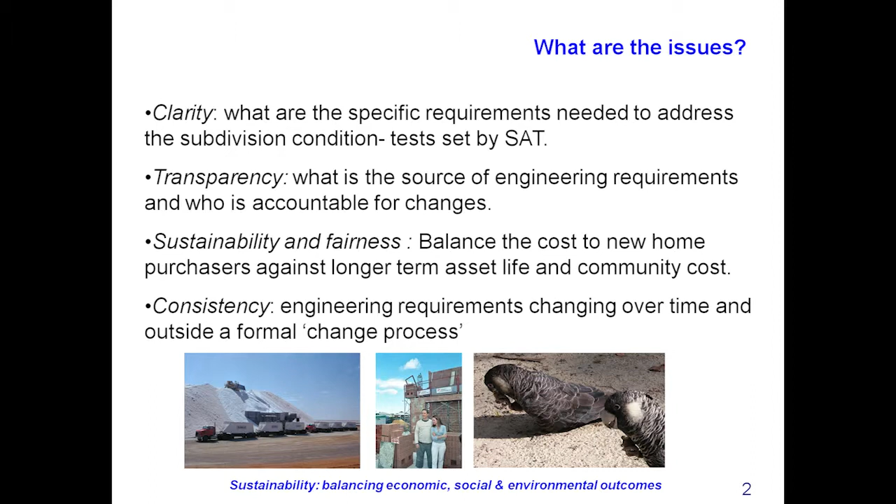Consistency, we mentioned that early on. Land development process, to be truthful, zoning and structure plan, and it says here, that's when you technocrats have got to get involved. Don't wait till you get the subdivision plan. That's a cadastral plan. It's already been to the state. It's already been approved. It's done. How many of you have turned around and said, hey, can't fit a roundabout in? I'll tell you why, because you didn't consider at this stage which were going to be your arterial roads and your district distributor ways and so on.

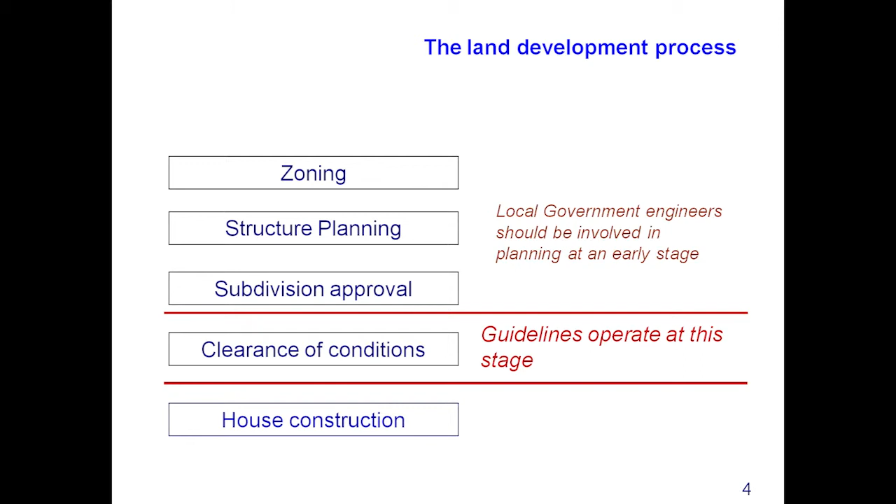And then your clearance, and that's a beauty. You know how you all tick the box and you sign off and you say, yeah, we've cleared it. No, you haven't. There's only one clearance authority in the state, and that's the WAPC. All you've done is said to them, we think they've done what they were supposed to have done. So our consultants overview, I'll run through very quickly. It needed to be upgraded. Legislation had changed, and we've been through that.

Policy documents, Liveable Neighbourhoods. How many in here hate it? Yeah, great, there's only one problem. State government's approved it as a policy, so learn it. Now, the reason you hate it, and I'll argue with you later, that's why I won't be here at morning tea, you haven't read it. You've read the bits you want to read. Read it from front cover to back cover, and guess what? All your standards apply. All the criteria that used to apply still apply, except you've got to prove it.

Biggest one, truncations on corners. Don't need them, and you don't. Two cars travelling at 30k don't need a truncation on two 14-metre road reserves. Check it out. Go and do your Austroads calculation. Lift the speed limit, and yes, you do need them. And that's all it says in Liveable Neighbourhoods. Check your Austroads, prove your calcs and say, I need a 4x4 or a 6x6 or a 3x3, and it'll be given to you. There's not a problem, but you've got to do the work, just a little bit of work.

Innovations and materials, as we would all say, and drainage is probably going to be the biggest innovation that's coming up. Water sensitive urban design. Don't we all love it? I've got a nice little catchphrase for you at the end, and then I'll run.

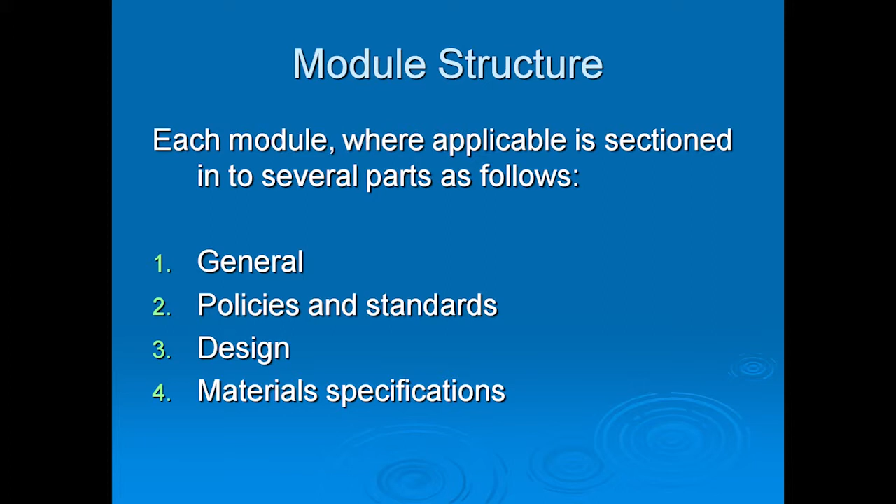You've had asphalt, stone mastic asphalt, and so on over a period of time. We structured the modules such that they've got a general part, policies and standard, the design, materials and specifications. That runs consistently through the document. And here's module number 4, drainage. The ones that we picked up were Stormwater Management Manual, Better Urban Water Management and Liveable Neighbourhoods, because those 3, if you put them together, will generally give you a very, very good basis of designing drainage.

Liveable Neighbourhoods is element 5. You've got water sensitive urban design. This one, and I'm assuming Bill Till will talk a lot about that, is water quality. That is into our water bodies, our groundwater, and so on. I know Jim Davies did a lot of work for the western suburbs on water going to the ocean and so on, and he may allude to that. I'm going to highlight later water quantity.

Now, you can look in the eastern states and say, well, why would we bother? But that's to do with the Department of Water. Those of you that want to get into flood mitigation, go and talk to the Department of Water. They've got 3 guys in there to do nothing else. And they look at all the risks. And if you go through Australian Rainfall and Runoff and you look at flood mitigation, it's about that thick. And I'm not smart enough to go through it, I'll tell you now.

Nuisance insect management, flood protection, that's flood, not stormwater. They're two different things. A storm recurrence gives you so much water. A flood is when it rains and rains and rains, and then all of a sudden what was up the catchment comes down the catchment and we end up with the flood. Groundwater drainage, wouldn't see you doing a lot with that. Stormwater infiltration, yes, you'll be looking at that because that's part of water sensitive urban design, and flood storage.

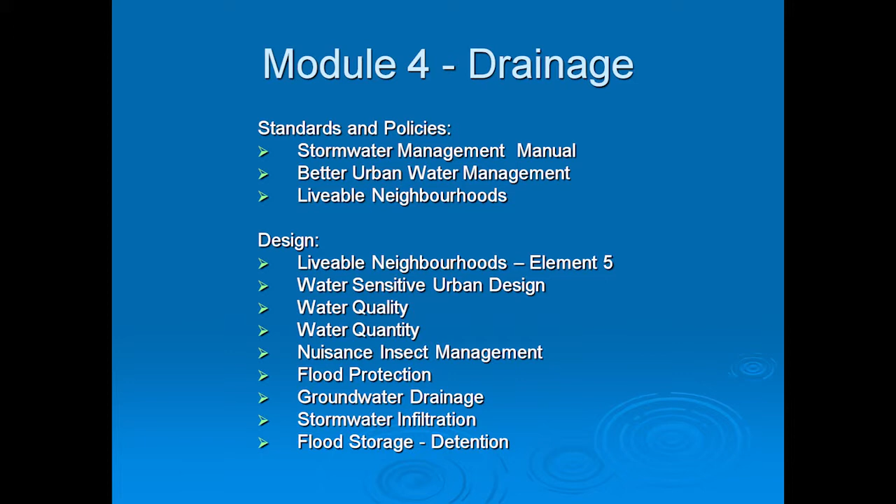Standards and policies, that manual, I'm not going to go into it, you can actually see it online. Same with Better Water. Most of this has come from the Commission and the Department of Water, and Liveable Neighbourhoods. So they're the 3. I have no intention of trying to go through those in a 20-minute talk.

Those of you that are up the back, there are seats down the front if you want to come down.

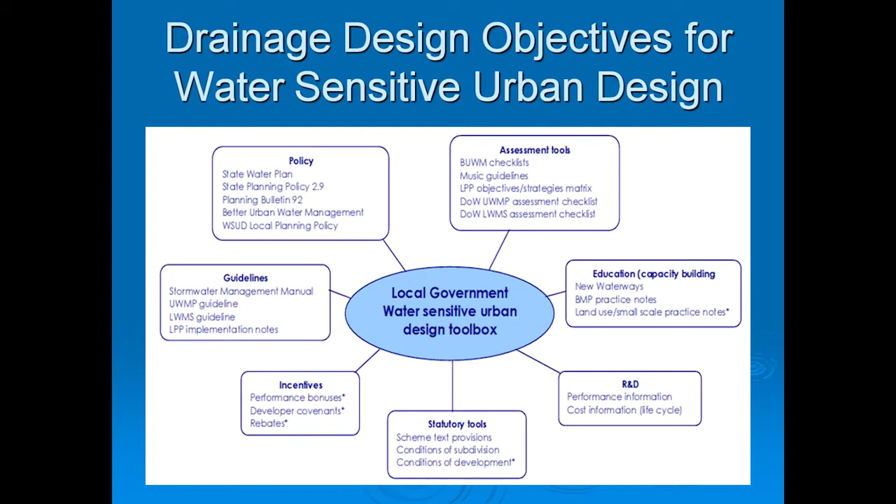So there is a chance there. Those of you that are CP engineers, these sort of things keep your qualification up. So there is new performance information, cost information, statutory tools, scheme provisions, which is where they're suggesting most of our stormwater requirements should be put into our structure plans and schemes. I think there's ways of talking to developers and saying, guys, if you do A, B and C, you'll get something out of it, and so on. And then there's your guidelines. So you probably need to have a look at that.

The principle is post-development discharge should be maintained at the pre-development conditions. Now, if that happens, you don't have to do a lot. Now, anybody knows if you've got a bare land and you've got bush in that and you go and clear it all, the coefficient of runoff changes pretty bad. You put roads in and all of a sudden certain of those areas are 95% runoff. Bang. There's no way in the world you're going to be able to make the post-development such that it equals pre-development and then not have to do anything. So I think that's one of the principles you need to look at. And you're looking at protecting your built environment from flooding and waterlogging and minimise public risk.

I've had an occasion, I'm currently working at a local authority, a 20-year storm went through probably about 2 months ago. And a guy got flooded and somebody said, but he built in the bottom of the hill. What's he expect? I mean, has anybody got a subdivisional condition that says if you buy the block at the bottom of the hill, you're a drainage sump? Because the drainage sump, surprisingly enough, is straight across the road from him.

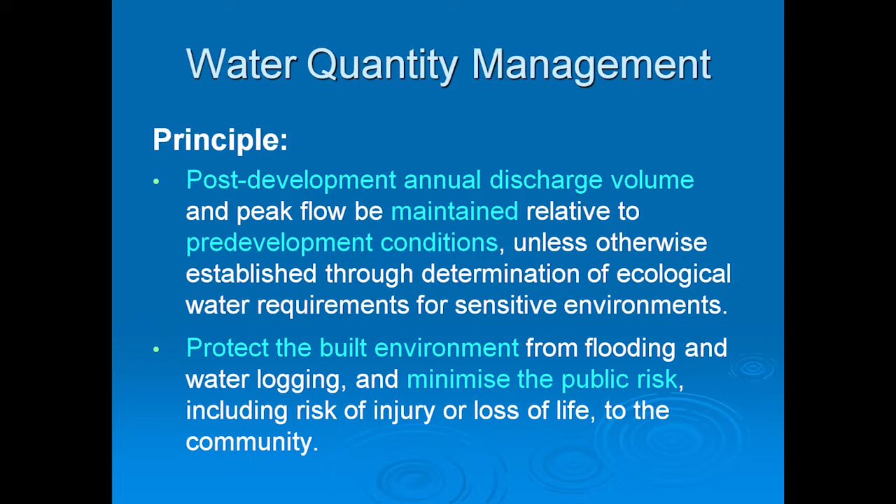Sent us 1986 photographs, probably should have whacked one in here, of a bloke rowing a canoe up his street. Meanwhile, his house has got 300 to 400 mil of water in it. He's now put in the insurance claim and the local authority is going to pay. There's no question, because when you see the catchment size, somebody didn't get it right. He's got the gullies at the bottom and the catchment is, I don't know, 52 hectares or something. Now, if you use just a little bit of common sense, you'll realise that there's no way in the world 2 gullies at the bottom of the hill is going to take that water in and get it across. It's just not going to work. So you've got to look at how you do that. Water quality, maintain surface and groundwater quality at pre-development levels.

And if possible, improve it. Now, some of the thought is, if we've got our massive drainage systems, is to do storage up the catchment, see if you can get it into an aquifer and stop it getting to the end. And to give you an example, you know, they like big stripping ponds, nutrient stripping ponds.

The Bayswater main drain, we're going back probably 20 years, had 6% of all the nutrients into the Swan River coming out of the Bayswater main drain. And our environmental people, and we formed the Bayswater Integrated Catchment Management Group, came up with this magic idea: we're going to have a nutrient stripping pond at Riverside Gardens before it goes in, 4.5 hectares. There was no Riverside Gardens when they'd finished with the nutrient stripping pond. No way the council was going to entertain that.

So we've gone back, looked at living streams, put things up the system, changed water from going one way to another and storing and cleansing water. And guess what? If I'm correct, we're down around about 1.3% into the river now. Now, it may have taken 20 years to do, but that was the alternative. But you've got to have a look at seeing if you can improve it.

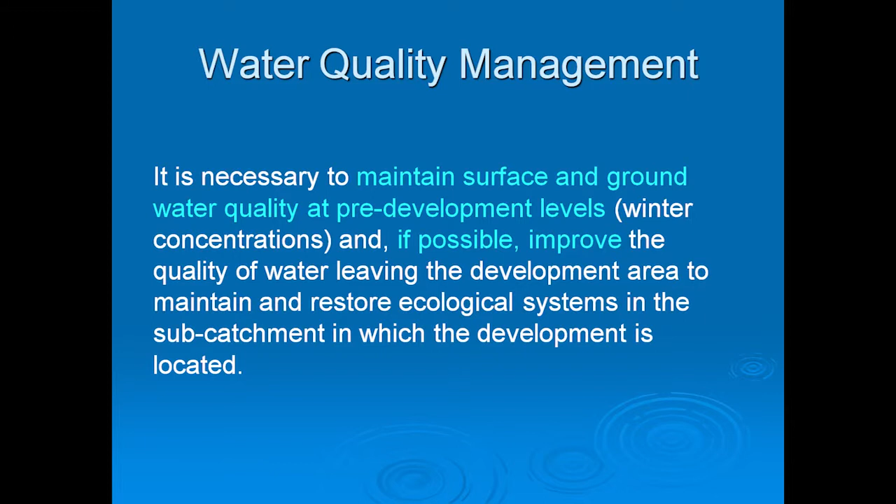Disease vector, what that's about is health risks from mosquitoes when you have retention and detention basins. And I got an education last week at the Peel Inlet, and they showed us all this mosquito breeding, and I was one of these idiots that thought 150 mil, warms up, mozzies, bang. So if we keep the water deep, it's okay. They showed us water like this, reeking with mosquito larvae, and I didn't think that happened. So you need to be pretty careful with that.

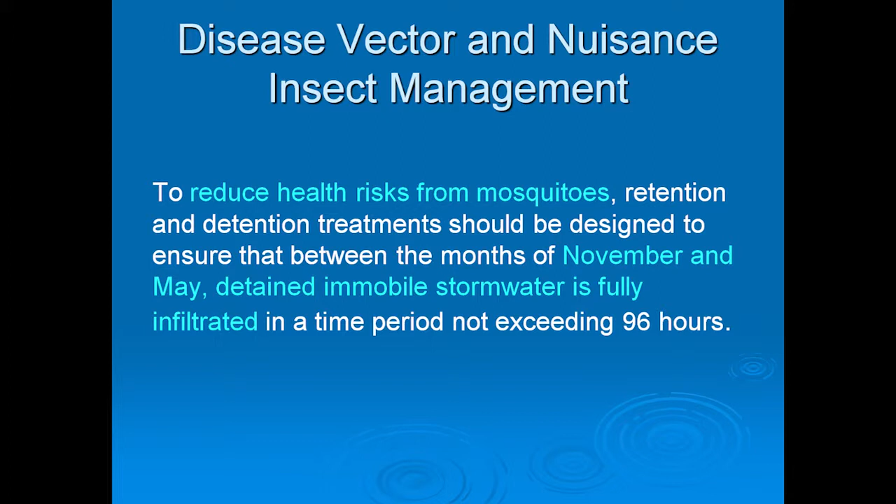Obviously, between November and May, detained immobile water is fully infiltrated. In other words, after you hit November, we prefer you to have no water laying around, unless it's in a lake or a river. You don't need to have areas where there's little bits of water laying around all over the place. So they wanted 96 hours, divided by 24, that's about 4 days, roughly. So that's what they're looking at.

Planning an integrated cycle. Consideration of water issues must be integrated with other planning and development. And that can include major shopping centres, major industrial areas and so on. You're looking at how you can dispose of that water without sticking it in a pipe and taking it faster than it used to make it to the water body.

That's the thing you need to remember with pipe drainage, that you may have runoff and have had it for decades, but as soon as you stick it in a pipe, it's now travelling way faster than it ever did before. Therefore, it gets to the end a lot quicker, and that is one of the reasons you can cause flooding downstream.

Key elements of your water-sensitive urban design.

I better just keep a check on here. I'm just about done. 2 minutes. I better get to that.

Flood protection. You can actually get these straight out of the manual. Okay, I've done that. They want a 1 in 1 year storm to go into your rain gardens, and above that, then it goes into a pipe system. So if that water's reduced, that means your pipe system's reduced.

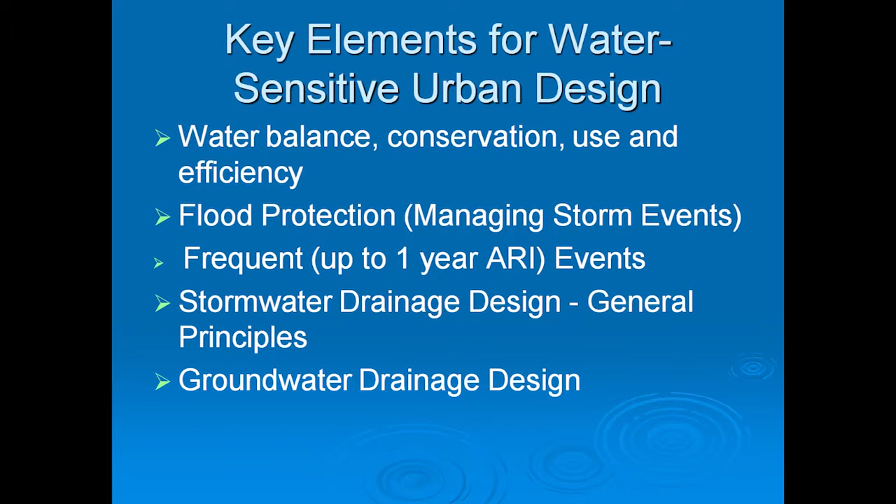The only question I have is what happens when you don't. I think everybody designed residential for 5-year and commercial for 10-year recurrent storms. What happens when you get the 20-year storm? None of it's going to work. So then you need to look at overland stormwater design, groundwater drainage design, urban areas, and I mean this is not rocket science, you'll all know this.

Water sensitive urban design, you've got grated gully side entry pits, you've got junction pits, subsoil drainage, these are all in this section 4, primary and district distributor roads, and there's a factor on there about the width of water in a gully, in a curb line. On major roads, you don't want traffic travelling at 70, 80, 90k and they're ploughing through 3.5 metres of water. Generally a metre is it.

So if you look at a car at 2.5 metres wide, you've got a 3.5 metre lane, you've got a metre of water, you've still got enough surface of the road for the car to run on.

Access, flood storage, detention facilities, I think they're pretty straightforward, and stormwater infiltration. That's a bit of a science because you've got to look at the permeability of your soil, what your inflow is, what your outflow is, and then you've got to have basins that take into account to hold that water for a certain amount of time while it infiltrates and the rest comes in.

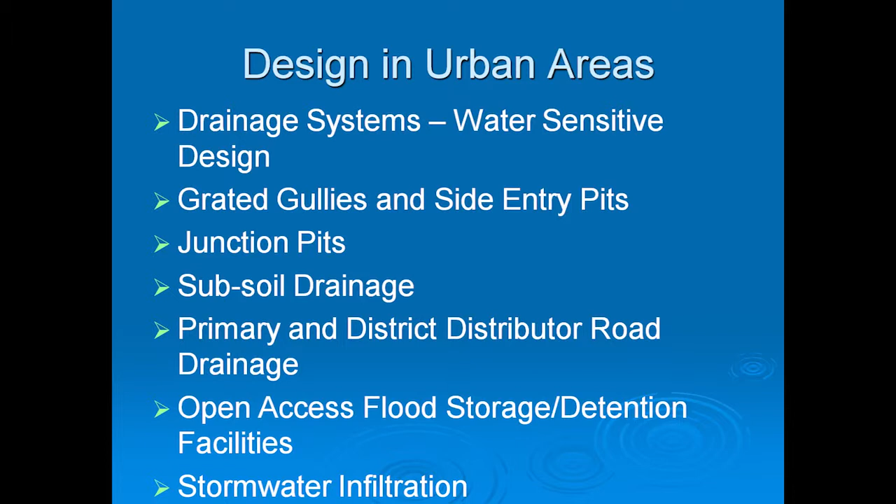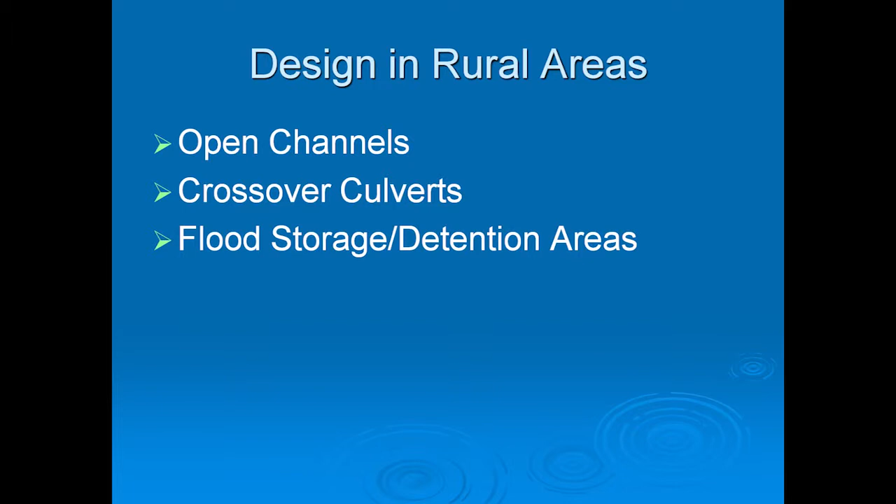Yeah, okay, I'll get to the rural. Now this is interesting. We put rural crossover culverts, flood storage and detention areas. Guess what? They operate in the urban area as well. Anybody not got half the Water Corp's open drains in their area?

Standard drainage criteria. And this is where, and I understand talking to Mr Davies this morning, he's going to talk about it as well. Terrific to produce your rain gardens, terrific to do your water sensitive urban design, terrific. But if your hydraulic grade line pops out of the ground, those of you designing drainage know the drainage system doesn't work. So whilst you can talk about water quality, and we're going to clean it, I've seen a particular bubble up system, I'm talking about, is 100 millimetres below the adjacent road, and the pipe system is about 80 metres from the gullies over there getting into this system here.

You can guess what happens to the road. 300 mil of water in it. Why? Because 100 mil of head loss in pipes and overland flow is nothing. So we are now going to spend 80 grand to take half the water somewhere else.

So when you're looking at these innovative things, don't throw out the window your previous standards, because, and you'll get it a lot more from Jim later, I understand, there's a quantity of water that's going to come to low points whether you like it or not. And you can do all the fancy stuff about cleaning it, but for God's sake, get the levels right.

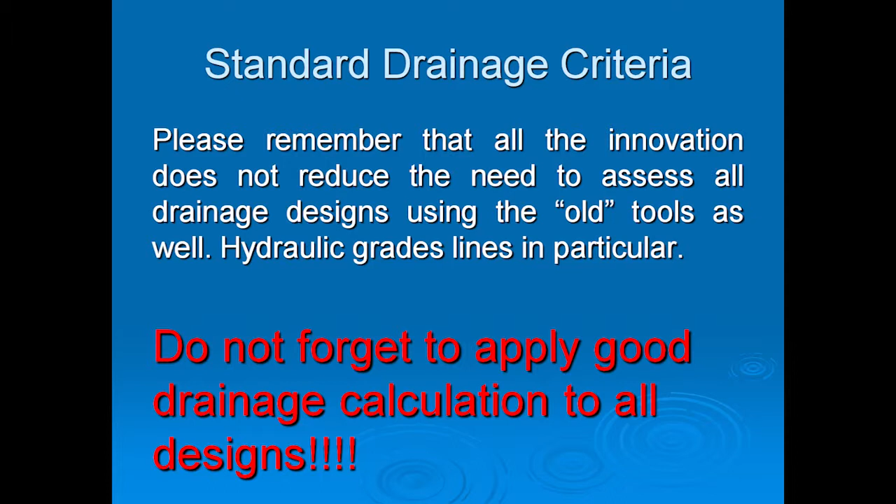If this design had been done and they deepened the swale, got it down below the outlet that was originally there, they might have had the estuary flowing back into it, but it doesn't matter. The point is that water body is low enough hydraulically to allow all the water to at least get there and be part of the system. So please, when you're designing, don't throw this stuff out with the bath water. Don't forget to apply good drainage calculations to all designs.

Where are we at? March 2011, those of you that came to the workshop in this very room produced massive requests and submissions. They were all considered by a committee that we went through before, that Martin Glover, who is now the ex Vice President, chaired. We had industry on there, the lot. They said some of them went in, they said some of them will wait, and they said some of them are not going in. And we just got to put up with that.

Now, the WAPC intended to make this a policy. That's the state's policy. They advertised it, and as part of the process, there were submissions. Those submissions have been considered, and the appropriate ones are being put into the new version. So I can't tell you what they are, and I can't tell you what the new version will be, but it's coming out. They've been considered by the committee.

A meeting was held, some of you attended, at the City of Canning with the people that had made submissions. They were setting up a committee of those people to allow them to have further input and discussion. That just supplies us with more information. Nobody's got a monopoly on innovation and thinking, so some of those things there, we may pick up something else. The latest revision is out.